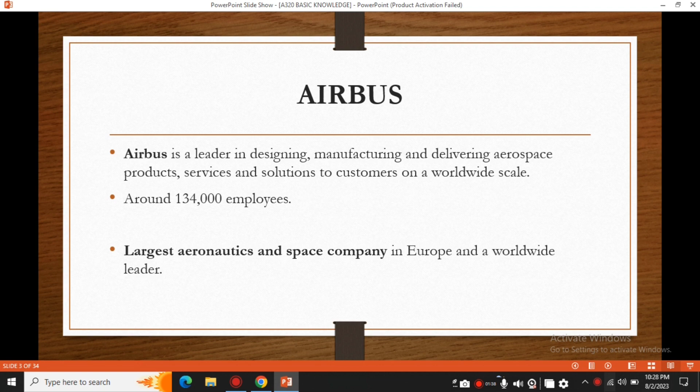Airbus is a leader in designing, manufacturing, delivering aerospace products, services and solutions to customers on a worldwide scale. Around more than 1,34,000 employees working with Airbus team, the largest aeronautic and space company in Europe and worldwide leaders. It's operated in multiple sectors including defense, commercial aircraft, helicopter and more. And with the latest technology they are going to come with hydrogen propulsion to power future aircraft, that is turboprop,

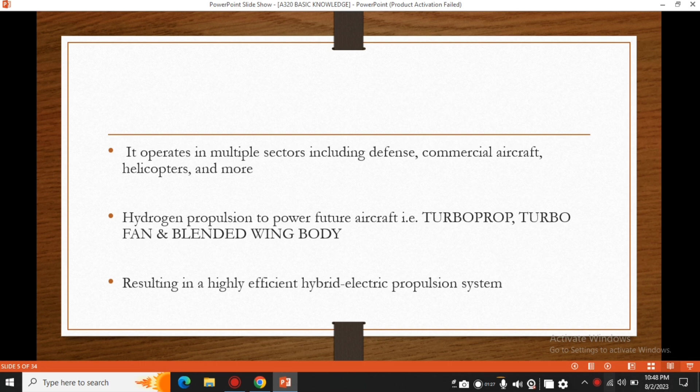turbofan and blended wing body. One of the beautiful aircraft, I will show the figure in the next slide, resulting in a highly efficient hybrid electric propulsion system.

Turboprop, you can see less than 100 passengers can be accommodated in this aircraft. Hydrogen hybrid turboprop engine installed on the wing, and it can go more than 1000 nautical miles, and liquid hydrogen storage distribution system installed in the fuselage body.

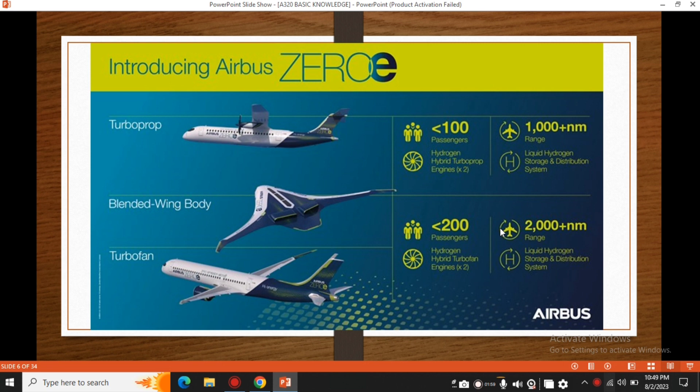And the blended wing turbofan can accommodate less than 200 passengers and operate up to 2000 plus nautical miles. Ambition is to develop the world's first hydrogen powered commercial aircraft by 2035.

High energy density of hydrogen, roughly 2.5 times higher than jet fuel. Unlike biofuel or hydropower, hydrogen does not require large areas of land to produce. Airbus aspires to create a 200 seat aircraft with up to 2300 miles range, that's around 3700 kilometers.

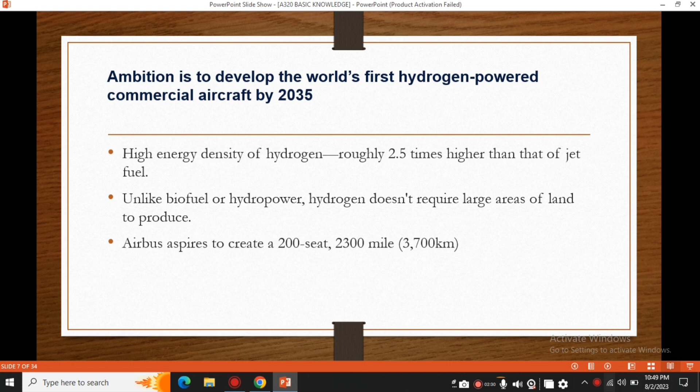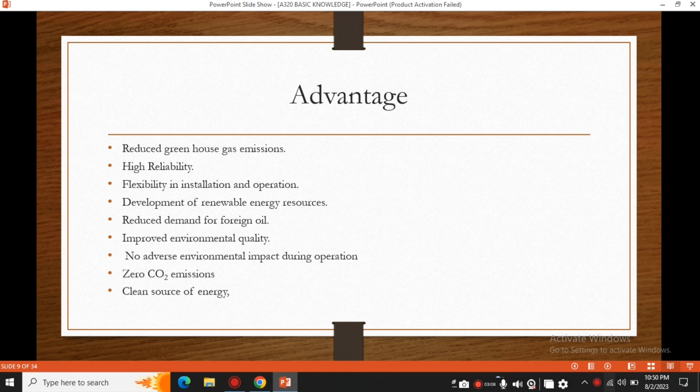of energy. And this is directly going to reduce the cost to the company, and this technology is going to help the future generation. Another one you can see, total 6 pods turboprop aircraft, which uses around 8 bladed propellers,

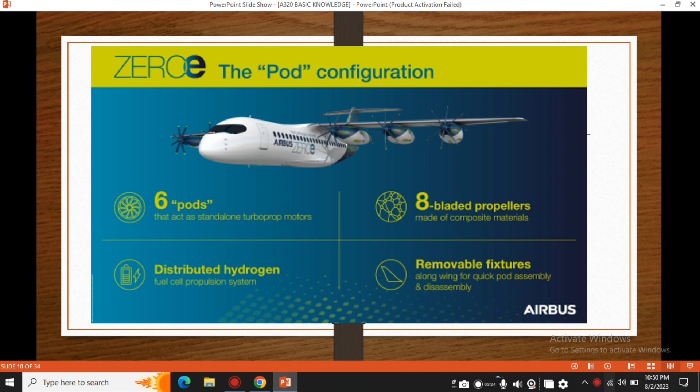easy installation and removal, same using hydrogen fuel. Disadvantages include high production cost and lack of infrastructure.

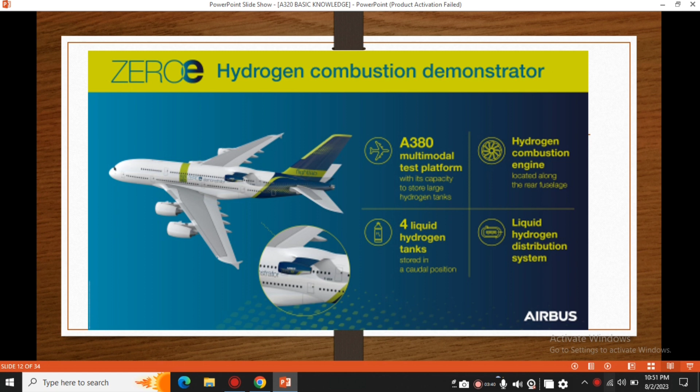This is the 380 aircraft with the hydrogen combustion engine located along the rear fuselage. 4 liquid hydrogen tanks can be installed on the rear side of the fuselage. This engine will look like this, and it will be one of the most beautiful engines if it succeeds in the market.

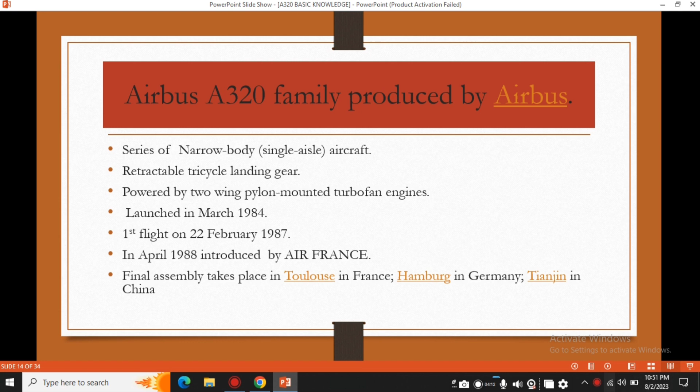Airbus 320 family produced by Airbus. Series of narrow-body single-aisle aircraft, retractable tricycle landing gear, powered by 2 wing pylon-mounted turbofan engines. The first launch was in March 1984. First flight operated 22 Feb 1987. In April 1988, introduced by Air France, and final assembly lines taking place in Toulouse, Hamburg, and Tianjin, China.

This aircraft family includes the 318, 319, 320, 321 - more details in the next slide. This is powered by CFM56 or IAE V2500, and the latest new engine option with CFM LEAP and Pratt & Whitney engines. A320 became the first airliner to fly with an all-digital fly-by-wire control system.

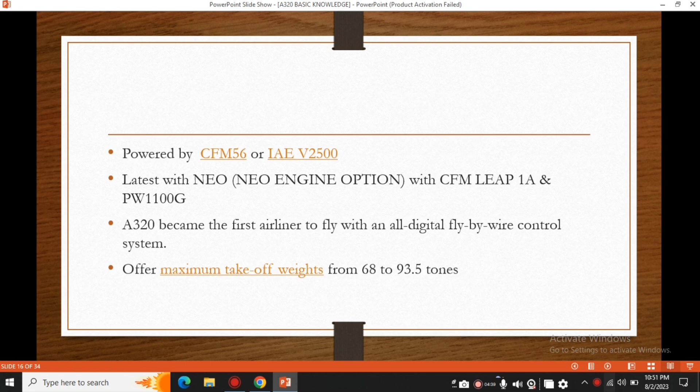Offers maximum takeoff weight from 68 to 93.5 tons. You can see on the left side the A320ceo with optional sharklets, and on the right side the A320neo with sharklets as standard. More efficient engine, up to 15 to 20% more fuel efficient.

This also helps prevent atmospheric effects, reduces noise and fuel cost, and this will benefit all the airlines.

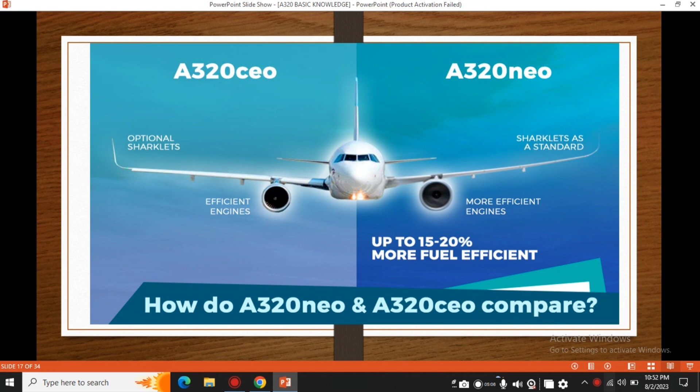A318 up to 107 to 132 passengers. A319 can accommodate up to 156 passengers. A320 accommodates 140 to 186 passengers. A321 offers 185 to 236 passengers, all depending on the company requirement and LOPA, layout of passenger arrangement.

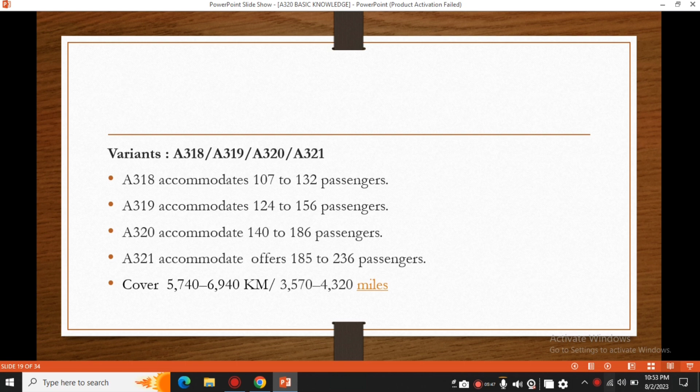This can cover up to 6,940 km, that is 4320 miles. These are all the Airbus family aircraft.

In December 2010, Airbus announced the A320neo, that is new engine option, which entered service with Lufthansa in January 2016. First neo aircraft with more efficient turbofan improvement, including sharklets, this offers up to 15% better fuel economy.

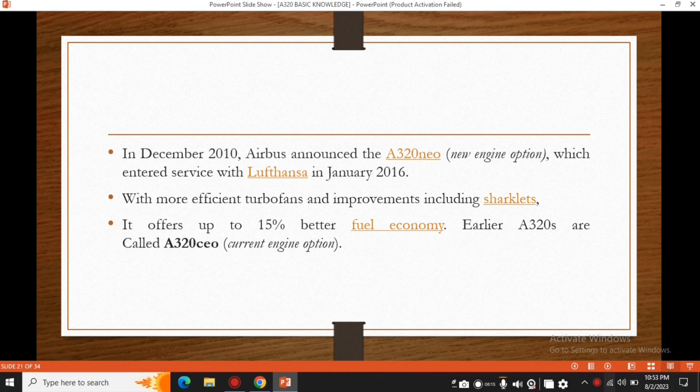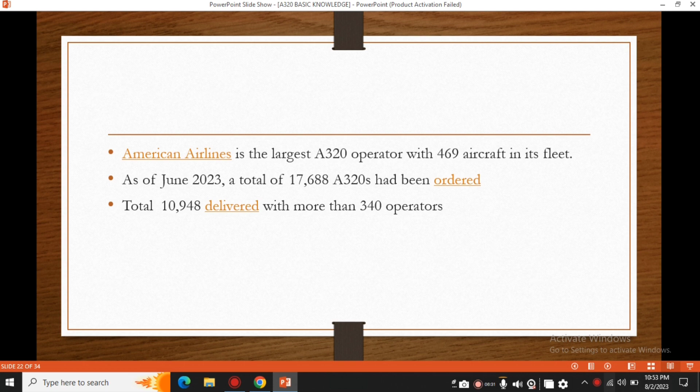Earlier A320s are called the current engine option. Right now, American Airlines is the largest operator of Airbus A320, operating 469 aircraft till date. In June 2023, Airbus got orders for 17,688 aircraft, and total they have delivered 10,948 aircraft to 340 operators.

Why did Airbus give the 380 such a high number? Looking at the Airbus line of commercial aircraft, you can see there is the A300, Airbus's first aircraft. A310, wide body aircraft smaller than the 300. A320, narrow body or domestic traveler. 330, twin engine wide body aircraft. 340, 4 engine long range, Boeing 747 competitor. 350, the most modern Airbus aircraft released to the market. 380, the famous double deck aircraft.

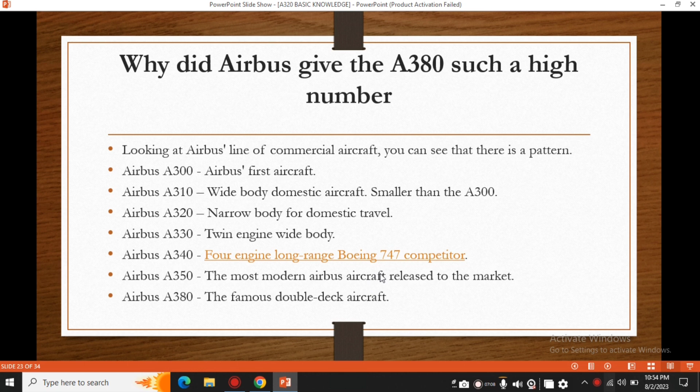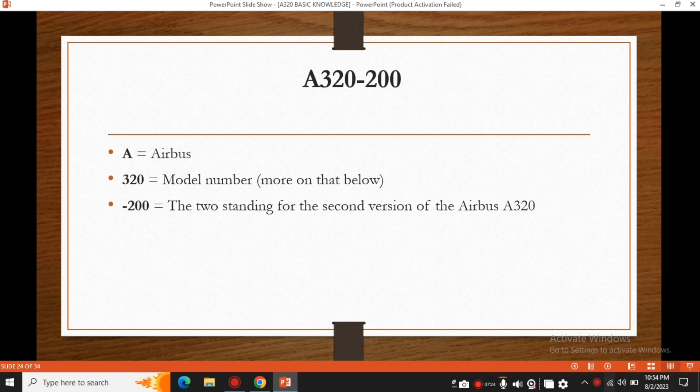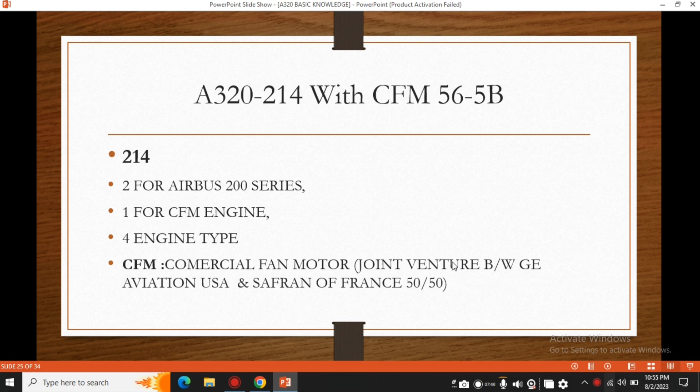214, A320-214 with CFM56-5B engine. This is current engine option. 2 for Airbus 200 series. 1 stands for CFM engine. 4 stands for engine type. CFM stands for Commercial Fan Motor, a joint venture between General Electric Aviation USA and Safran of France, 50/50.

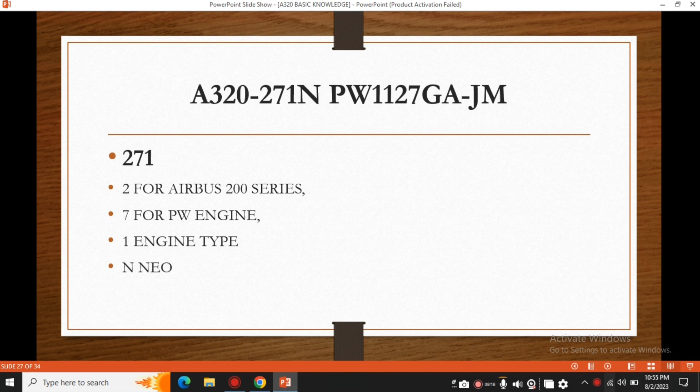Now coming to the neo engine, that is new engine option, A320-271. PW1127GA-JM. 271: 2 stands for Airbus 200 series, 7 stands for Pratt & Whitney engine, 1 is engine type, N stands for neo. PW stands for Pratt & Whitney, 1 is engine model 1000, ends with 1 for Airbus airframe, 27 thrust in pounds, that is 27,000 pounds, can be produced by this engine.

G stands for geared turbofan, FDGS. J stands for Japanese Aero Engine Corporation. A stands for alternate climb option. M for motor and turbine union.

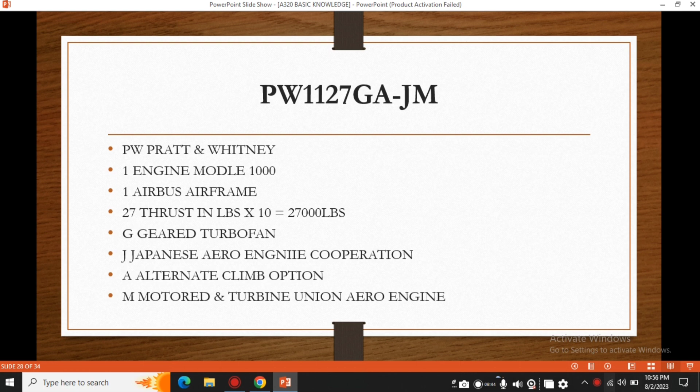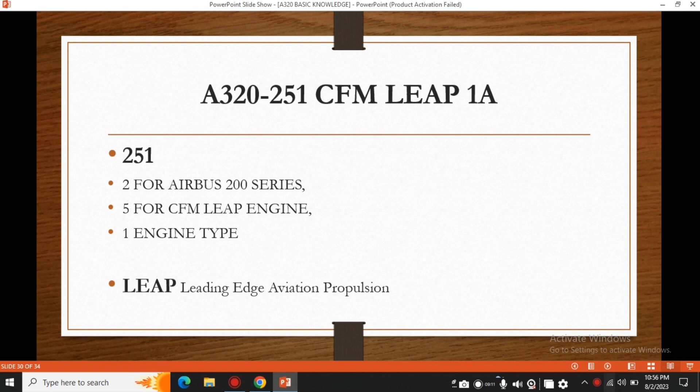A320-251, CFM LEAP 1A. 2 stands for the same Airbus 200 series, 5 stands for CFM LEAP engine, 1 is engine type. LEAP stands for Leading Edge Aviation Propulsion. This can power both Airbus and Boeing aircraft. This is the LEAP engine, look how it's high bypass ratio, 11:1.

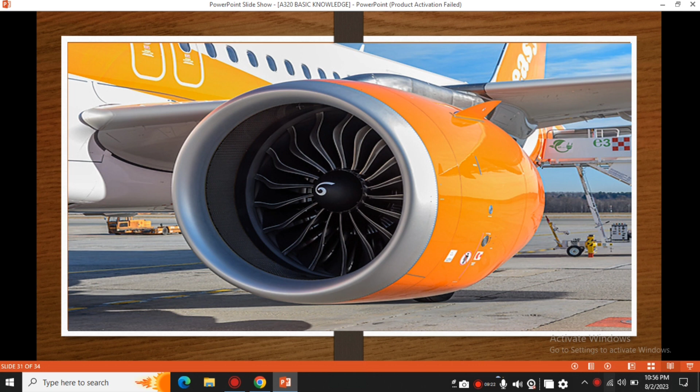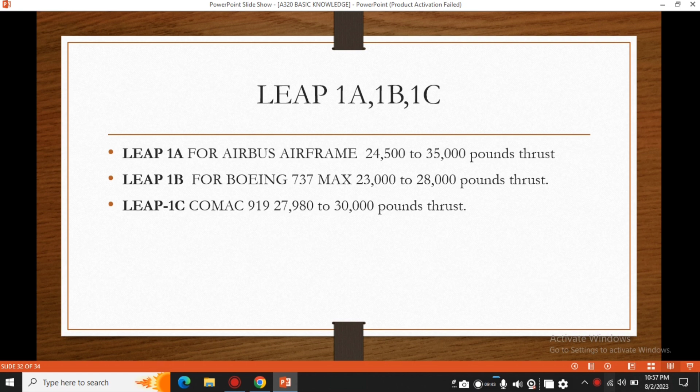LEAP has different variants: LEAP 1A, 1B, 1C. LEAP 1A for Airbus airframe will produce 24,500 to 35,000 pound thrust. LEAP 1B for Boeing 737 Max can produce up to 23,000 to 28,000 pound thrust. LEAP 1C used for Comac 919 aircraft can produce up to 30,000 pounds of thrust.

Another way you can see A320-2XYR. All A320-200 was equipped with different types of engines from different companies. So X is a code for the engine manufacturer, like GE, Rolls-Royce, PW. Y is a code for engine type, V2500 and CFM56.